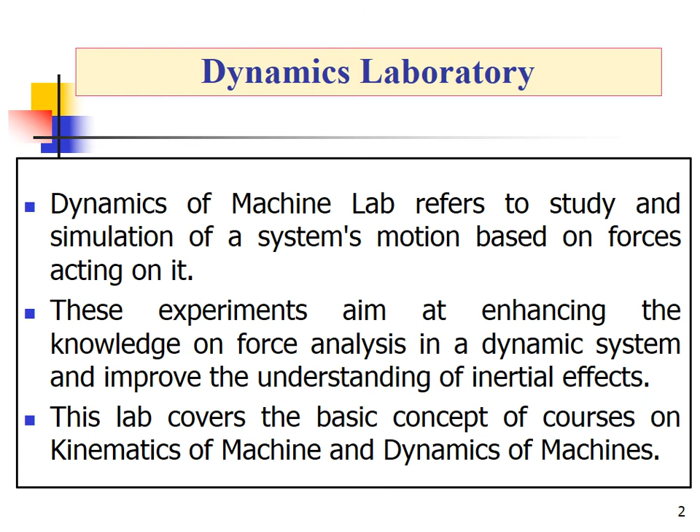Greetings to all. We are going to see the dynamics lab experiment of the Hartnell governor. These are the objectives of the dynamics laboratory: understanding and knowledge of kinematics of machines and dynamics of machines.

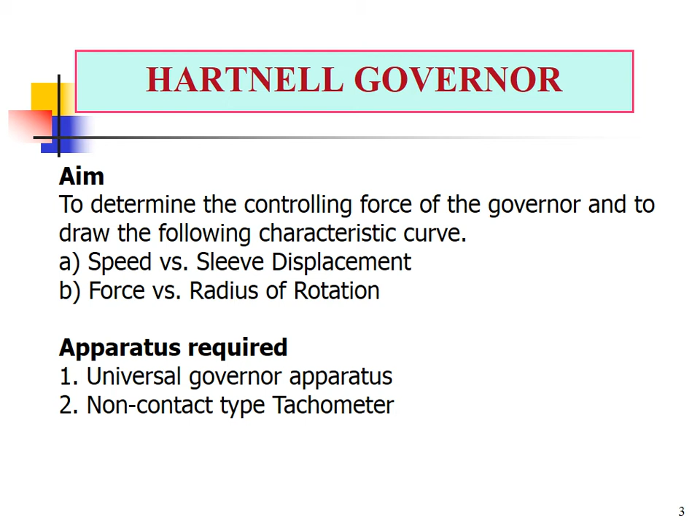The aim of the Hartnell governor experiment is to determine the controlling force of the governor and draw the following characteristic curves. The apparatus required for the Hartnell governor: universal governor apparatus and a non-contact type tachometer.

Governors are generally used to regulate or control the speed of the engine based on the varying levels of the load at the output. They regulate the speed of the engine, since the fuel injected is based on the speed variation, and based on the speed variation the supply of fuel may vary to regulate the speed of the engine. The Hartnell governor is a spring controlled governor.

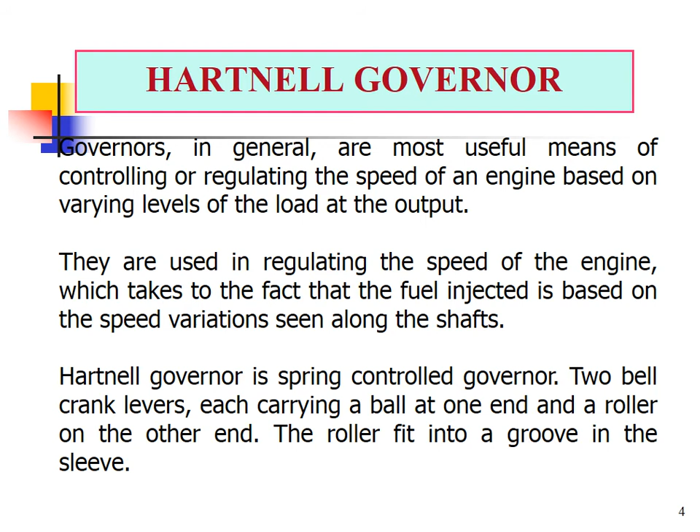Two bell crank levers, each carrying a ball at one end and a roller at the other, are available, and the rollers fit into the groove in the sleeve. The frame is attached to the governor spindle, hence rotates with it. A helical spring in compression provides equal downward force on the two rollers through a collar on the sleeve.

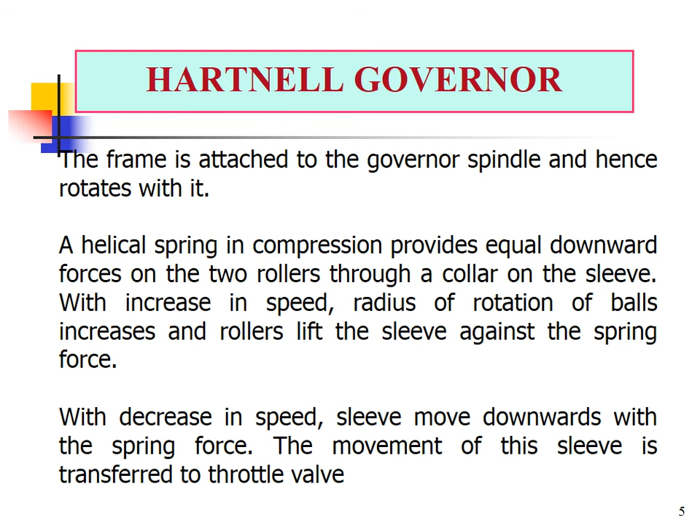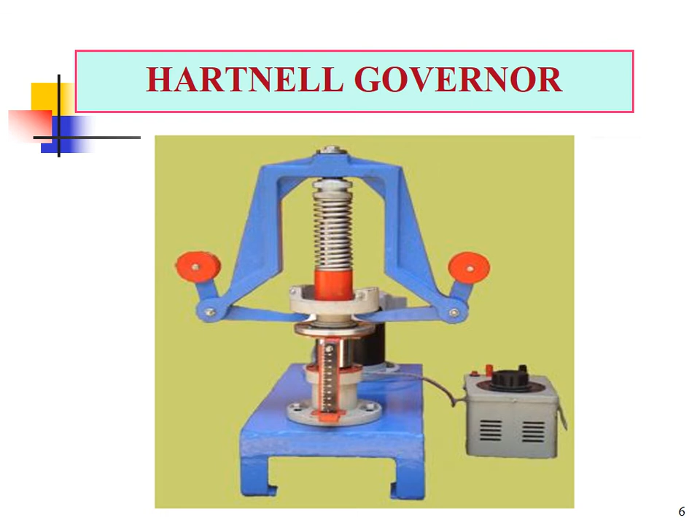When we increase the speed, the radius of rotation of the balls increases, and the rollers and the sleeve are lifted against the spring force. When we decrease the speed, the sleeve moves downwards with the spring force. The movement of the sleeve is transferred to the throttle valve to supply the fuel. This figure shows the Hartnell governor, and in the video you can understand very clearly the Hartnell governor setup.

When we increase the speed, the radius of rotation of the balls also increases, and the sleeve moves in the upward direction. When we increase the speed, it moves in the upward direction. When we decrease the speed, the sleeve moves in the downward direction. The speed is measured by means of a tachometer.

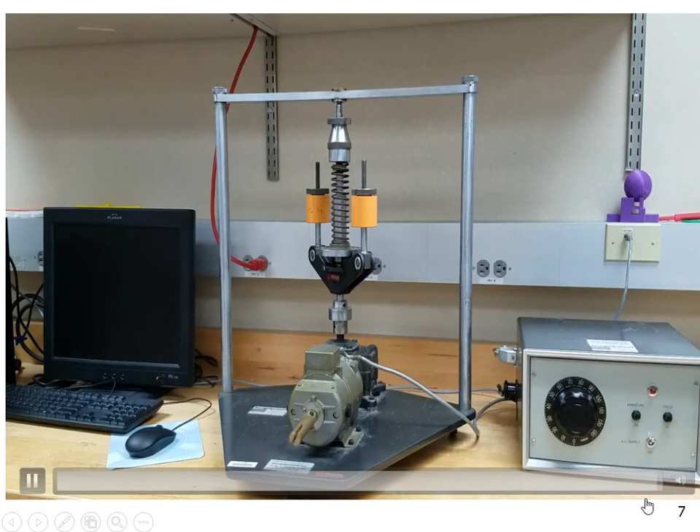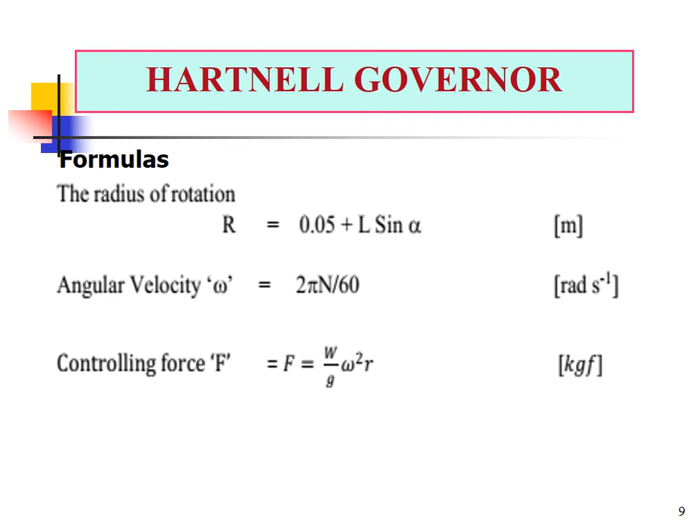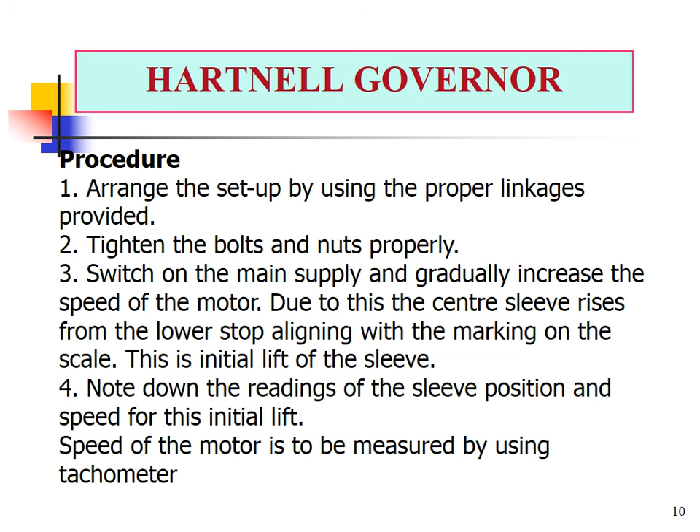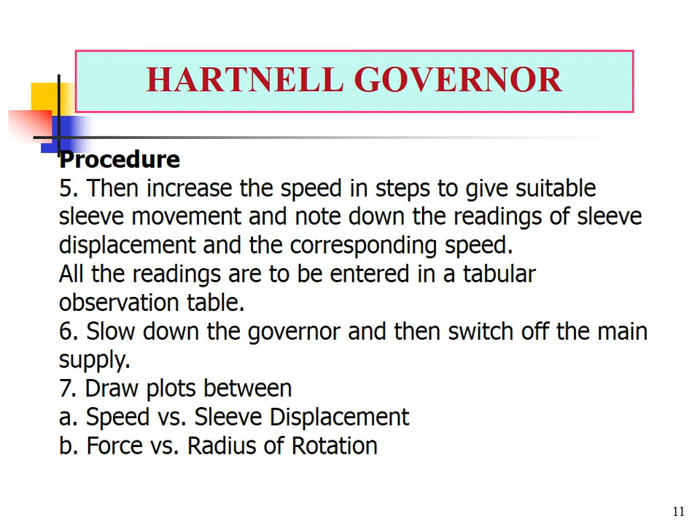When we increase the speed in steps, with suitable sleeve movement, note down the readings of the sleeve displacement for the corresponding speed. All the readings are entered in the observation table, then slow down the governor and switch off the main supply. Finally, draw the plots of speed versus sleeve displacement and force versus radius of rotation.

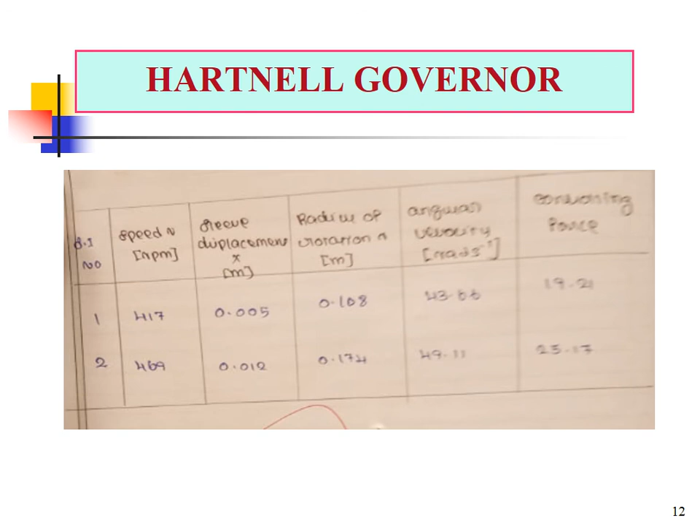This is the tabulation for the Hartnell governor: speed, sleeve displacement, radius of rotation, angular velocity, and controlling force. Speed 417 rpm, sleeve displacement 0.005 meter, radius of rotation 0.108, angular velocity 43.66, and controlling force 19.21 kgf. And this is the model calculation of the values of the tabular column.

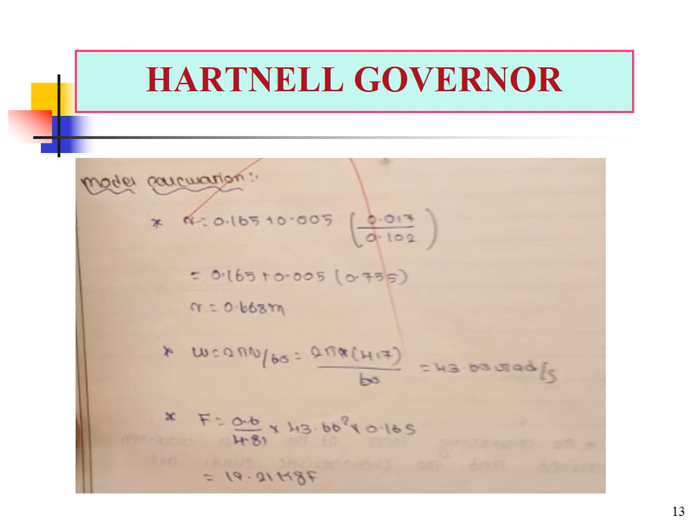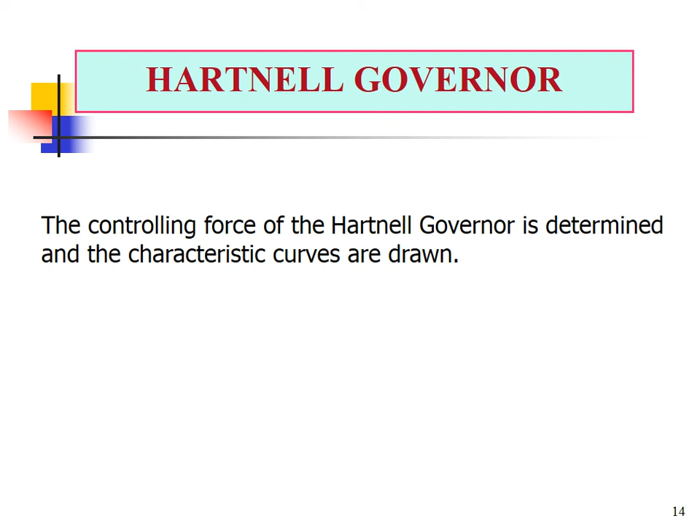All the readings can be taken and calculated using the model calculation and formulas: R values, omega values, and then controlling force 19.21 kg. After calculating and tabulating all the values, from these values we have to draw the characteristic curves for the Hartnell governor.